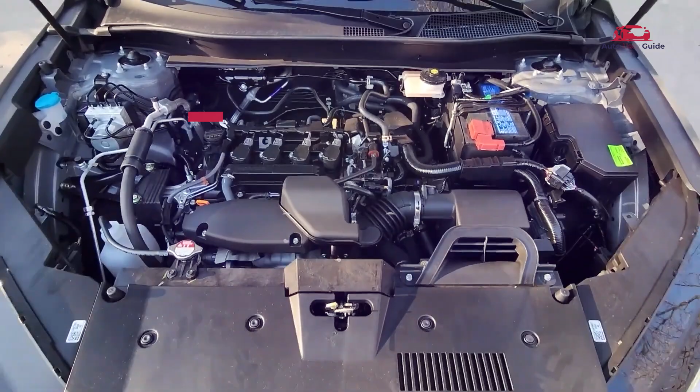In this guide, we will explore the 2025 Honda Ridgeline fuse box diagram and location, providing essential insights for maintaining your vehicle's electrical systems. From locating the fuse box to understanding the function of each fuse, this user guide simplifies troubleshooting and repairs.

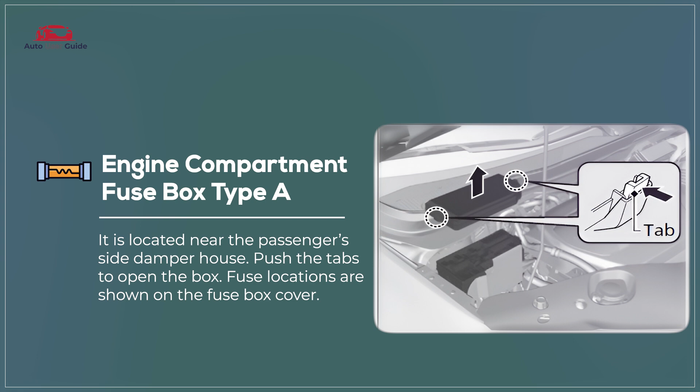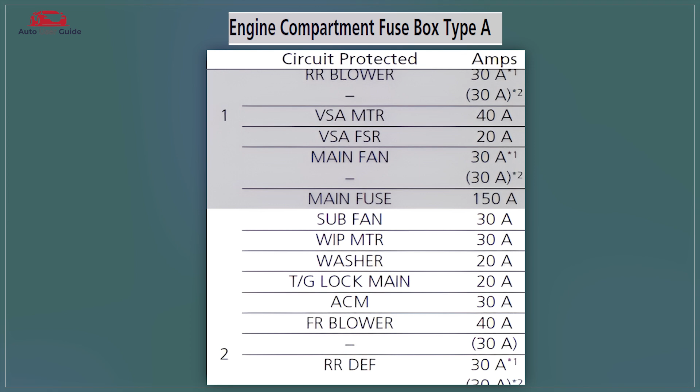Engine compartment fuse box type A. The engine compartment fuse box type A in the 2025 Honda Ridgeline is designed to house essential fuses for critical systems, ensuring efficient power distribution. It features a durable, weather-resistant casing and clearly labeled fuse locations for easy identification.

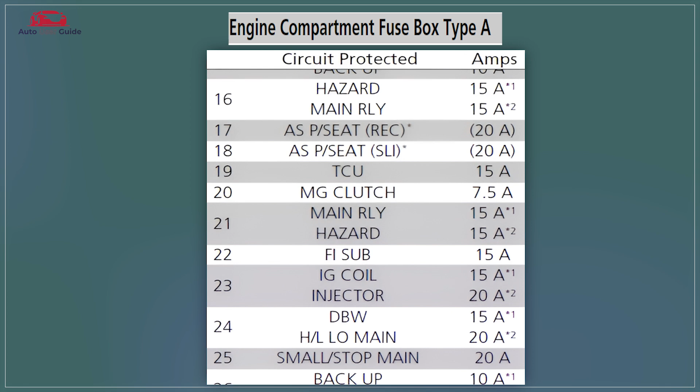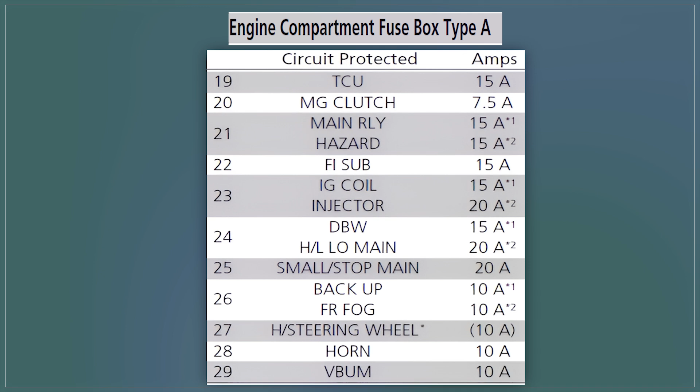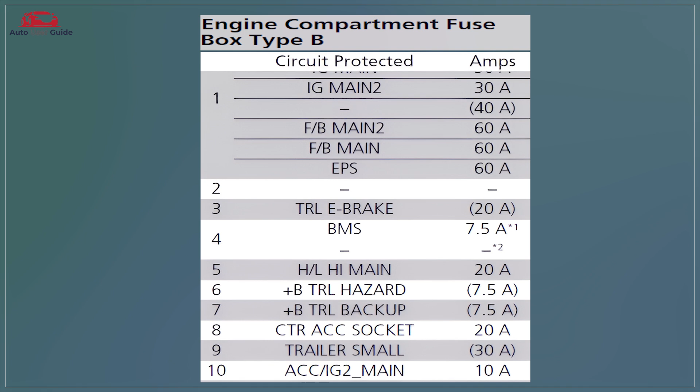Engine compartment fuse box type B. The engine compartment fuse box type B in the 2025 Honda Ridgeline offers quick access to auxiliary fuses, featuring a compact design and clear labeling for convenience.

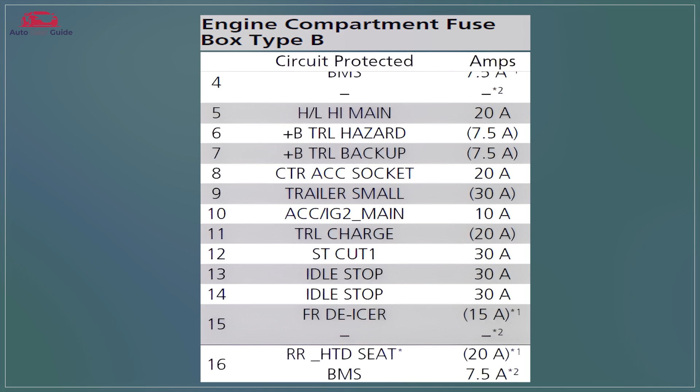Interior fuse box type A. The interior fuse box type A provides power to various interior accessories like the power windows, mirrors, and audio system. It also houses fuses for the lighting system, such as the headlights and taillights.

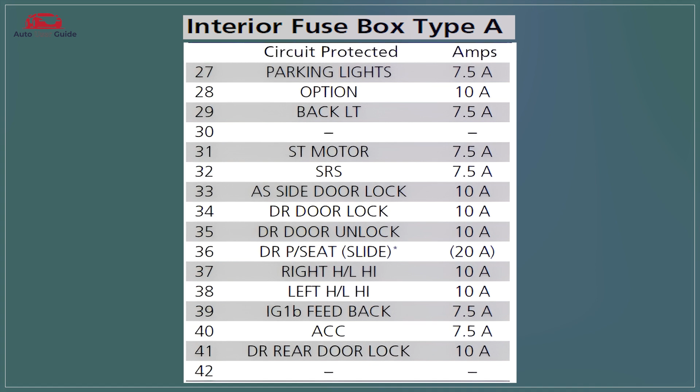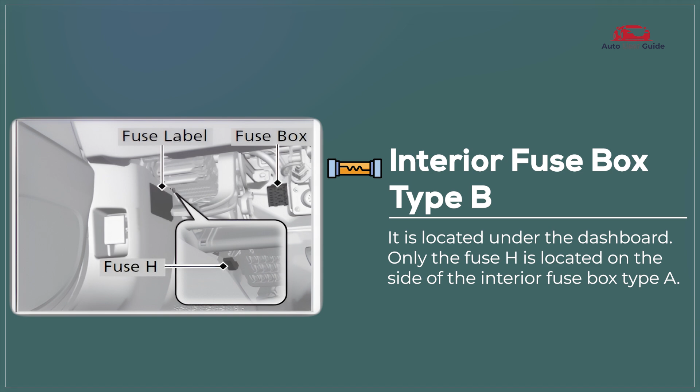Interior fuse box type B. The interior fuse box type B typically powers the power windows, mirrors, and other accessories on the passenger side of the vehicle. It may also contain fuses for the lighting system on the passenger side of the car.

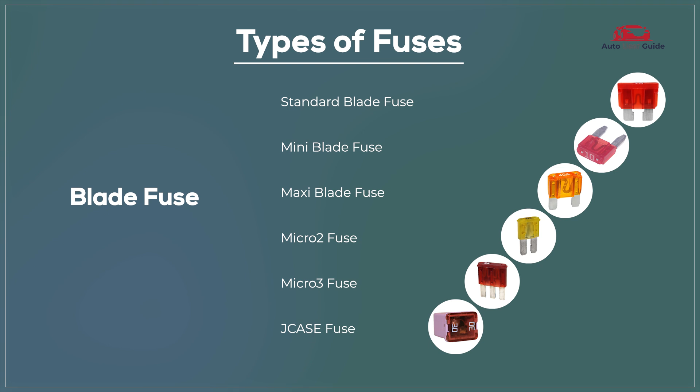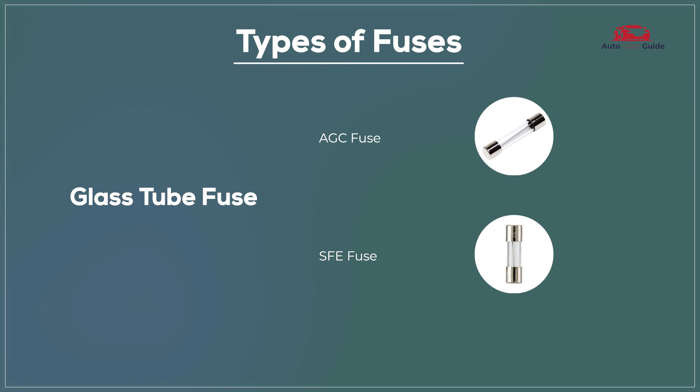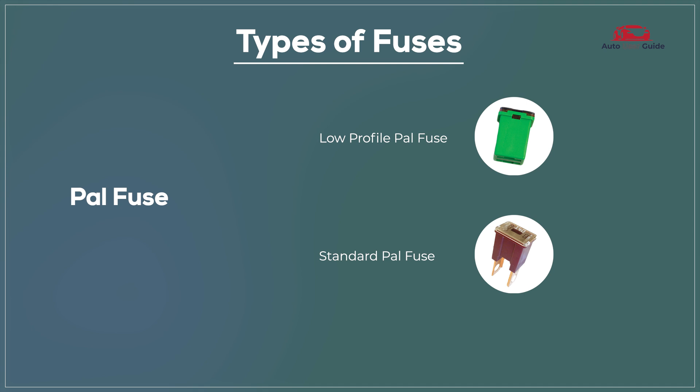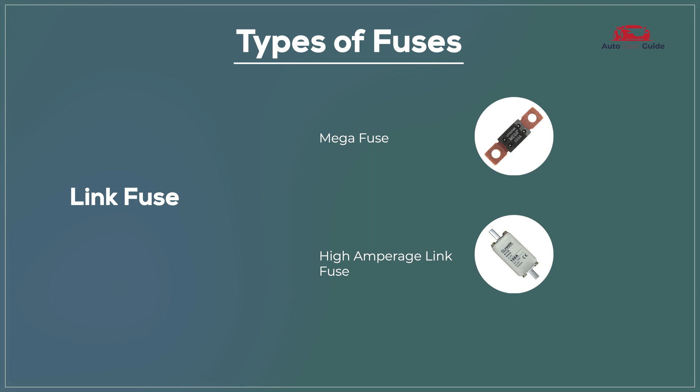Types of fuses: blade fuse, standard blade fuse, mini blade fuse, maxi blade fuse, micro 2 fuse, micro 3 fuse, J-case fuse, glass tube fuse, AGC fuse, SFE fuse, ceramic fuse, Bosch fuse, DIN fuse, PAL fuse, low profile PAL fuse, standard PAL fuse, link fuse, mega fuse, high amperage link fuse.

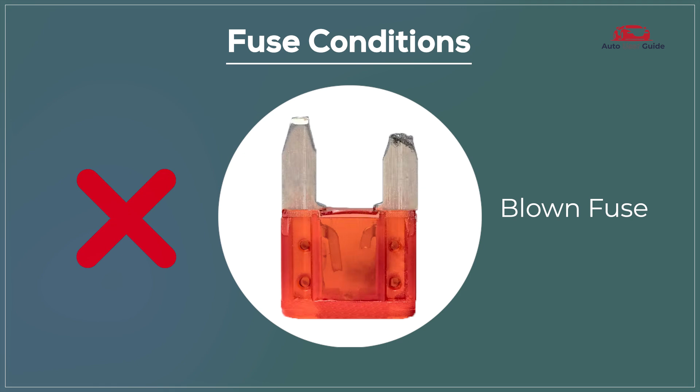Fuse conditions. Blown fuse: a blown fuse means it's no longer functioning and needs replacement, while a perfect fuse is in good working condition and performing as expected.

How to change fuses: turn off the vehicle, locate the fuse box, identify the faulty fuse, remove the faulty fuse, inspect and obtain a replacement, install the new fuse, test the replacement.